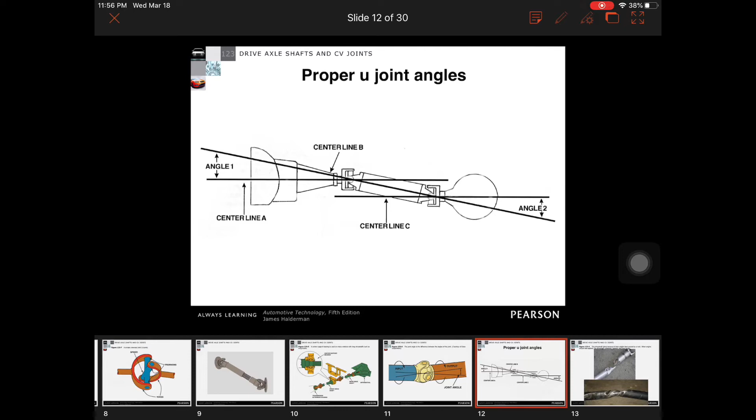So when we look at a drive shaft on a vehicle, we're going to see one of two styles. We're either going to see a drive shaft like this, which is basically two U-joints and a shaft -- doesn't necessarily mean the slip shaft's going to be here, it's probably going to be into the transmission -- but the other style we're going to see is a little bit more like this.

Well, the trick here is that this U-joint really has almost no working angle. It's probably going to be a degree at the most, more likely a half a degree, but it will get some movement from the transmission flex.

The reason we do this is because we don't want our overall drive shaft length to be too long. If we do that, it creates weakness in the drive line. It's kind of the same deal as taking a really long extension and putting it in an impact and spinning at full speed -- that thing wants to basically bend sideways on you, right?

So we don't want to do that with the drive shaft. What we want to do is maintain that length and keep it shorter, probably less than 60 inches ish -- I mean, that's just me. But so if that's the case on like my truck, which is a crew cab long bed, you better believe I got me a nice little carrier bearing in there to shorten that drive line up.

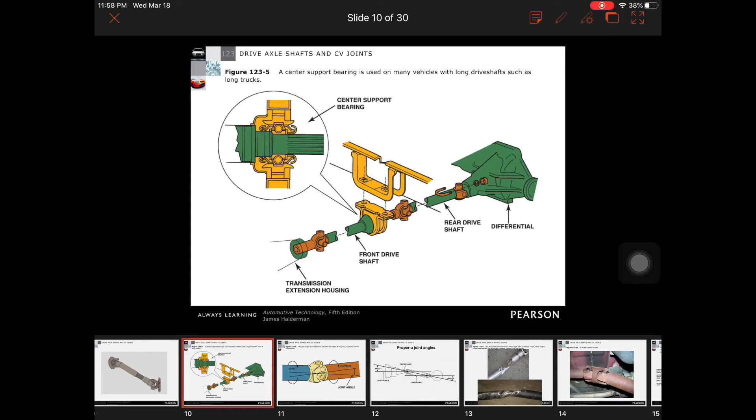Usually what will happen is you'll get a dent in one because they hit something on the road that came up and hit the drive shaft, and they don't know until the next time that they go to do a burnout, and then you hear a boom, and guess what? Now you have two pieces, and that's no good.

Actually, in high performance or racing applications, they usually require a hoop to be mounted around this, and that hoop is there to catch the drive shaft and keep it from just destroying everything underneath the vehicle. Kind of keeps it all safe, I guess is the best way to put that. So this is one way that a drive shaft is going to fail.

The other way, obviously, is going to be U-joint failure. By far, a U-joint failure is going to be the most common type. So if we think back to the video where we were watching that driveline squeak, we would replace that U-joint because the bearing itself was dry and they had flat spots, which is also something that's called Brinelling.

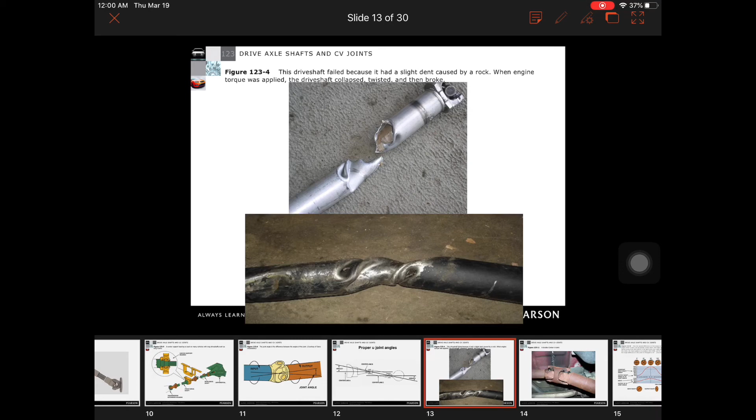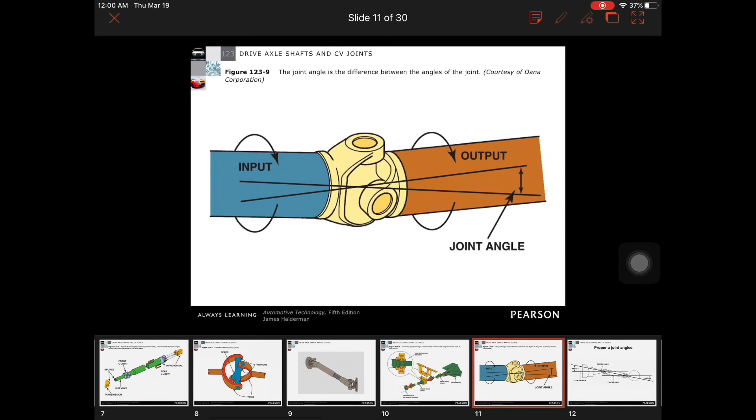So remember, our U-joints that we replace are going to look like this, right? We're going to have, here, let me go to a better picture. So we're going to have our cross right here, and then possibly two knuckles, one on either side, or two yokes, I'm sorry, and the bearings and the caps. So typically what we see is going to look like this, and if that's the case, go ahead and replace it. That's fine. It's not too hard to do.